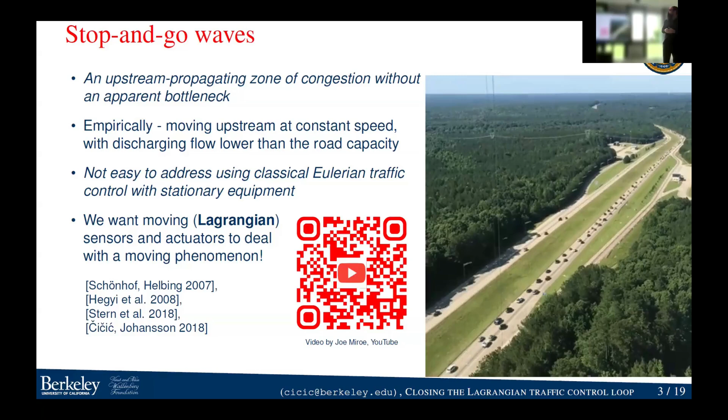So the overall structure of the talk you see here. In the first part, I will present the overall structure of the Lagrangian traffic control loop. I will very briefly go through all elements of it. And then I will talk about something a bit more recent and probably a bit closer to what you all are working on, trying to bring the whole traffic control story a bit closer to vehicles themselves, but more on that soon.

The overall Lagrangian traffic control loop looks something like this. So I will basically go through this whole loop, starting with the sensing, the actuation, the traffic model, the model learning, the traffic state reconstruction and prediction, and control law. So in the first part, I will be going through this control loop and explaining all parts, starting with the model.

Now, I do not believe you are very familiar with traffic modeling, am I right? Yes, somewhat, but yeah.

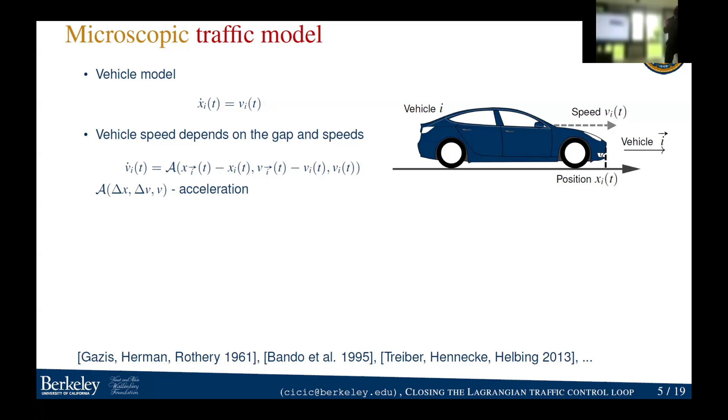Well, if you think about how to model traffic overall, if you're thinking about the individual vehicles, you really cannot go simpler than just looking at their longitudinal motion. You have their position, they evolve according to whatever their speed is, and then their acceleration will depend somehow on the gap between the vehicle itself and the vehicle downstream of it, and also the speeds and the differences in speed.

But we can go even further and say, well, if we're able to represent the traffic state in an aggregate manner by the traffic density, then the speed at a certain point where the vehicle is will just depend on the general traffic conditions around this vehicle. And that's how we end up with the simplest form of traffic flow model, which is the Lighthill-Whitham-Richards model. This model is just a simple conservation law that describes the evolution of traffic density, rho, and the traffic flow, Q, is directly defined as a function of the traffic density.

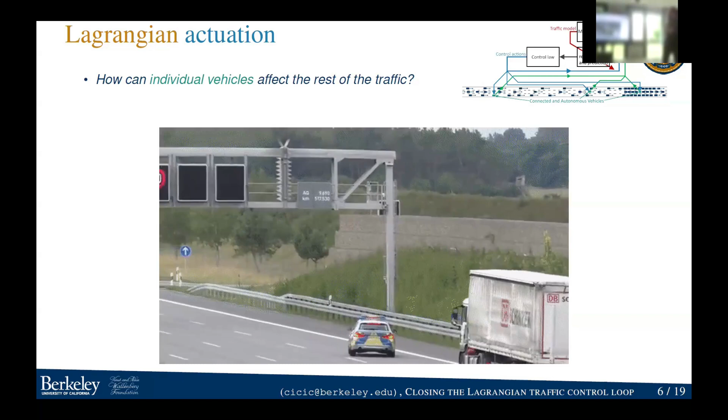And how can we control it? Well, how can we affect the traffic that consists of many vehicles by trying to control only a single vehicle? Is that realistic? Well, if you're a police car, it is very realistic. And what you see here is a police car performing what's called a traffic break. This maneuver is typically done for safety reasons, where there's some accident downstream, where the car would start meandering around the road and blocking the entire traffic flow. So that is a bit of an extreme case, but it shows that we can affect the traffic using a single vehicle.

Now, a bit more realistically, we really have two inputs, two ways to enter this system. So thinking of a single vehicle, we are definitely going to be able to issue some sort of a reference speed for it that it tries to follow, but it does not necessarily need to follow, because if we give it a very high speed, it might not be able to follow that speed due to traffic conditions. And this speed will basically determine its longitudinal motion.

And then apart from that, we might be able to set some target lanes for it. So tell it, go all the way to the right, or take the second lane from the right, or something like that. Now, the reason why this might be important is if you have a truck platoon, such as you see here, if you command one of these trucks to come to the next lane instead of following this lane, then all of a sudden you have a bit of a different picture.

So whereas in the beginning, the trucks were taking only one lane, now if these trucks are moving slowly, they will restrict the traffic flow quite a bit. You're blocking 2 out of 3 lanes, so that should affect the situation quite a bit. The way we can model that is by considering these trucks to be moving bottlenecks, which, if you've driven behind a truck, they definitely are, but here is how we do that mathematically.

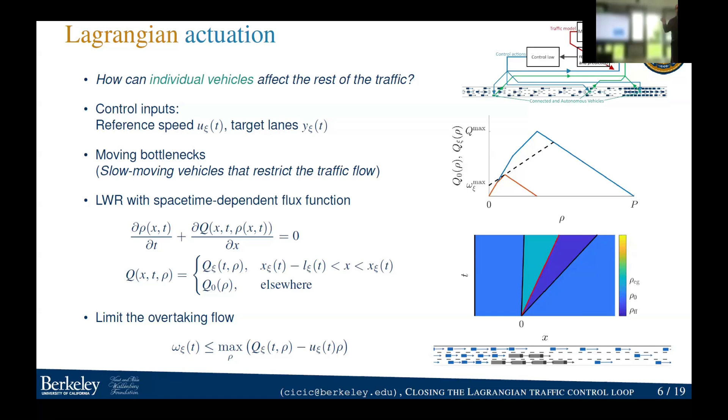Mathematically we can represent this by an LWR model, but now we have this flux function that is dependent on space-time. So essentially, where the road is open, we have one flux function, which is the big one, and then where we have our moving bottlenecks, we will have a different reduced flux function. That's one way to think. Essentially, we're restricting the overtaking flow. Now, that's basically the situation when it comes to the actuation. That's one way we can affect the traffic flow.

What about sensing? So next time you're in San Francisco, you can experience an autonomous vehicle. You can hail Waymo. And one thing that was really interesting for me was in Waymo, you have this screen that is showing you what the robotaxi is perceiving around it. The first time I was in Waymo, this was really interesting for me, because the vehicle, which has a LiDAR and many other sensors, has a pretty good picture of what's going on around it. So it knows where all of the other vehicles are, because otherwise it's not very safe.

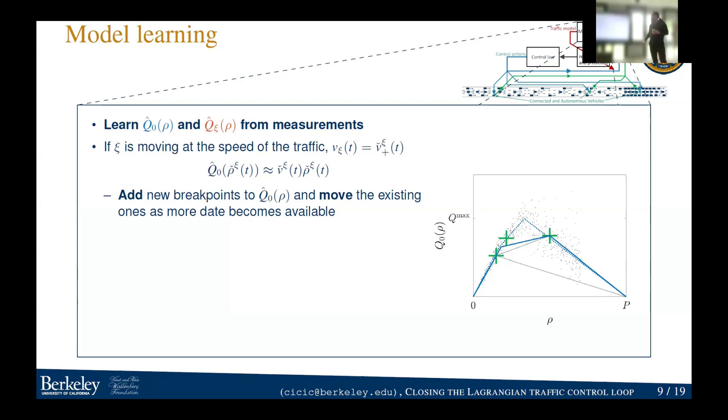As we gather more data, we should get a better picture of what this flux function should look like. After some time, this is what we get. Now, for the effect of the moving bottleneck, the situation is more complicated because we cannot directly measure the traffic state on this flux function. Instead, we can rely on the fact that the downstream and upstream traffic conditions should follow the form I talked about before.

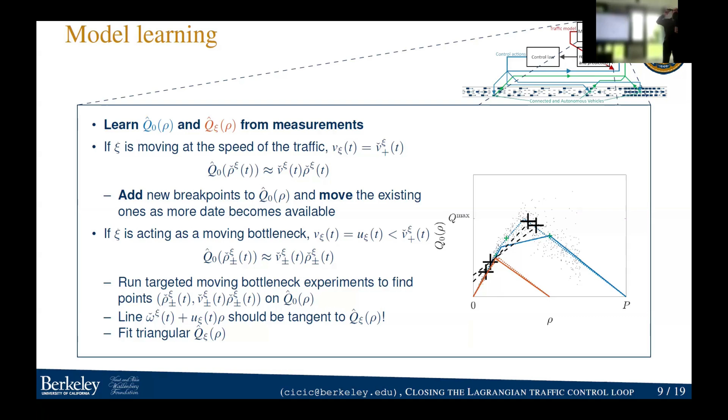Essentially, the line connecting the downstream and upstream traffic conditions should be a tangent to the moving bottleneck flux function, and its slope should equal the speed of the moving bottleneck. So by collecting more and more data, we are able to fit a moving bottleneck flux function that best describes this data.

Once we have the model, once we have a reconstructed traffic state, we can actually start implementing some traffic control. And in particular here, what we're trying to do is dissipate a stop and go wave. So first, what are the controlled inputs? Well, like I said, the speed of a moving bottleneck will be one control input.

And then based on how we arrange multiple vehicles, let's say we have a platoon of vehicles and we can command them to take one lane or to take two lanes. So based on how we arrange them, we might be able to essentially control how much overtaking traffic flow they might admit. And that is the story about blocking one lane or blocking two lanes or similar things like that. So based on their formation, the limitations on the overtaking flow might be another control input that we might be able to use.

So overall, if we want to minimize the traffic total time spent, which is a general metric for how good the traffic is flowing, we just want to maximize early outflow. So we want to push as many vehicles out of the system as possible, as early as possible. Now, if there is a stop and go wave, then this stop and go wave will be acting as essentially a limit to how much throughput the road can take.

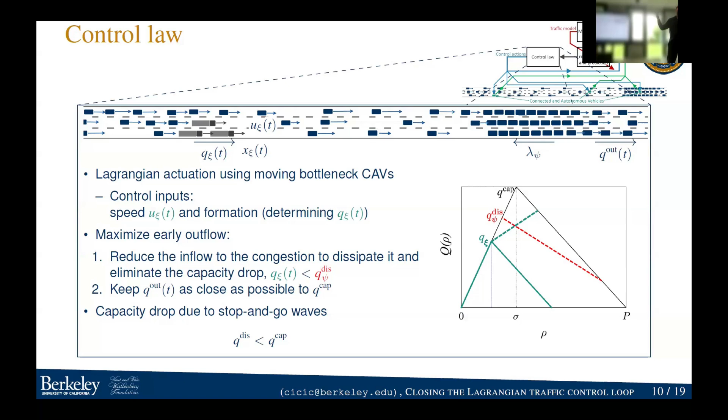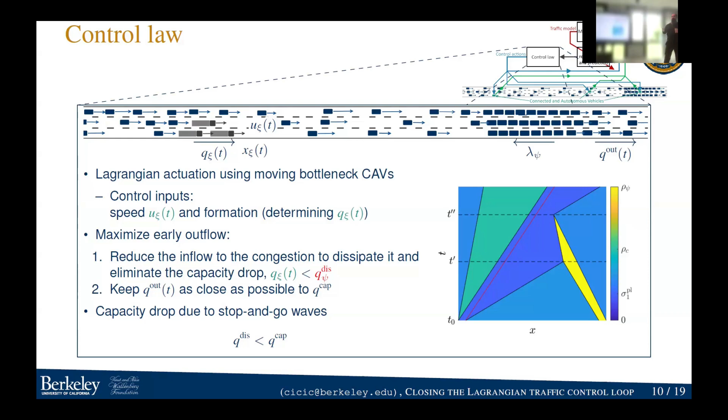Now, if you have a single vehicle on a two-lane road, well, in order to dissipate a stop and go wave, we need to be able to restrict the inflow to a level that is lower than its outflow. So if you have a two-lane road and you're controlling a single vehicle, it might not be that hard to do, actually, because you're blocking half the flow. However, if you have a multiple lane road and you're only controlling a single vehicle, then you might have a bit of a problem achieving this, because the outflow from the stop and go wave is reduced, but it's not that reduced.

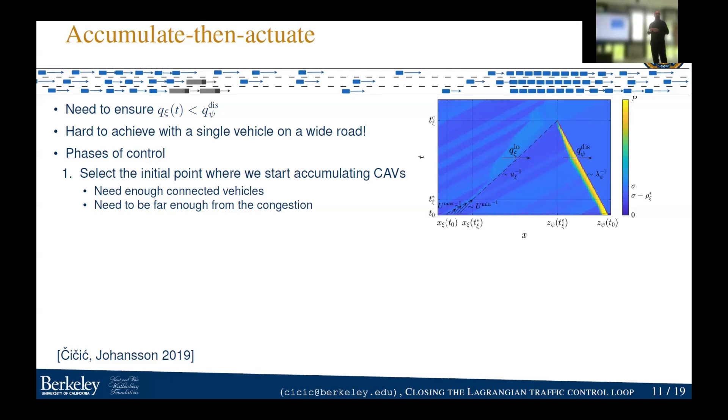So instead of immediately controlling vehicles as moving bottlenecks, we might need an extra step. First, we can try to accumulate enough vehicles so that we can create a unit that is driving together. And by doing that, we will now be able to block multiple lanes, or in this case, 2 lanes out of 3. And if you're able to block multiple lanes, then you're likely to be able to restrict the inflow to the stop and go wave to a lower level than its outflow.

So essentially, first we select where we collect the vehicles, then the vehicles that are downstream slow down, the vehicles that are upstream speed up. Once we have enough vehicles, then we start acting as a moving bottleneck and dissipating the stop and go wave. And the nice thing here is that if we have a lower penetration rate of the vehicles, it would just take more time to collect enough vehicles in order to implement this traffic control. But we will still be able to do the traffic control, it'll just take a bit more time.

So that basically wraps up this full Lagrangian traffic control loop. So to recapitulate a bit, we use the vehicles as Lagrangian sensors to sense the traffic conditions. Based on the measurement, we learn the traffic model. By combining this learned traffic model and the measurements, we are able to reconstruct the broader traffic state.

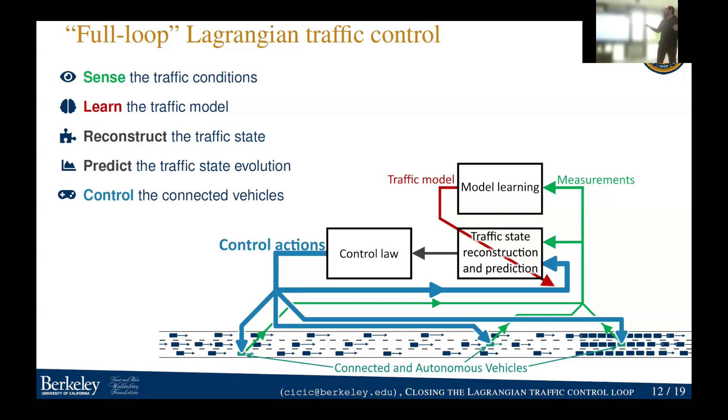And then also applying the model, we predict the evolution of the traffic state based on the control action that we take. And ultimately, we're able to dissipate congestion on the road. So as an example, I give here a scenario where we have stop and go waves randomly arriving from the downstream end of some road, and they're being dissipated by multiple connected autonomous vehicles acting as moving bottlenecks. Well, the exact details are not that important.

Now, if we have full information about what's going on the road, we can start strategically slowing these vehicles down, having them act as moving bottlenecks, and then basically ensuring that these stop and go waves are dissipated sooner. So instead of having them go on in time, these stop and go waves will be dissipated.

Now, even if we do not have the full information about the traffic state nor the traffic model, then applying the model learning that I talked about in the traffic state reconstruction, we're still able to do a similar job. Of course, because we have less information, the control performance is not as good, but we're still able to dissipate the stop and go waves and control the traffic.

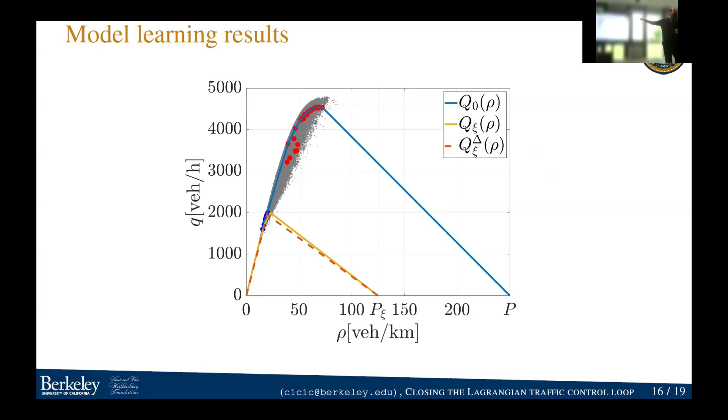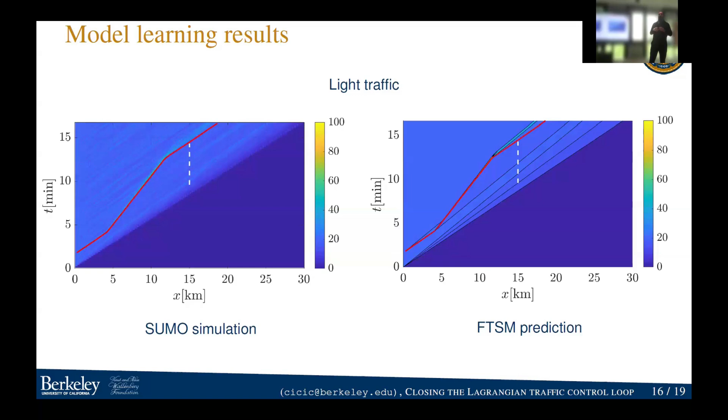The same thing happens when the traffic is lighter. With the previous level of traffic, we correctly predicted that there will be some congestion building up at the moving bottleneck. In case of lighter traffic, there's much less congestion, and we correctly predict that as well. So that's all great, but there are three big problems, three major issues with this work.

First one is the traffic simulation should be more realistic. In particular, here we used SUMO as the microscopic traffic simulator, and while the car following model was pretty good, we used the intelligent driver model, we had instant lane changing. So basically, vehicles were teleporting to the next lane. Is that a problem? Maybe, maybe not. It's not a very realistic situation at any rate.

The second one is, what we assumed is that if a vehicle is close to our Lagrangian agent, so our ego vehicle in essence, which in this case was the actuator vehicle acting as a moving bottleneck, like 100 meters away from it, that we just know its trajectory. And that might not be a very realistic assumption to make.

The third problem is we don't really know if this would really work with a human driver. In this case, all of the vehicles were being just simulated. So whatever the microscopic model was saying would happen, that's basically what we assumed would happen.

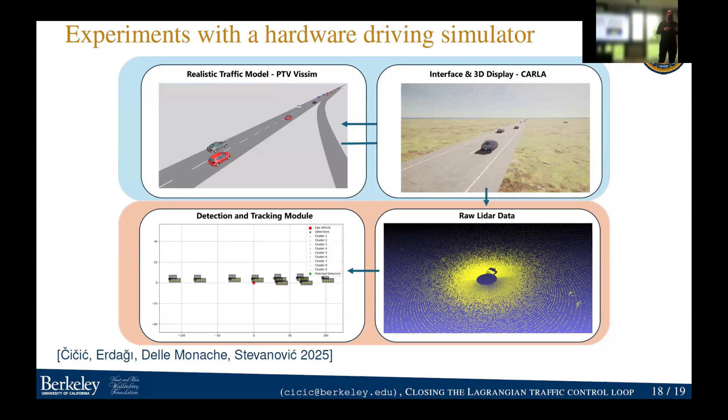Furthermore, we had the hardware driving platform where we had my co-author, Gökçe, drive one of these two vehicles. So we wanted to essentially replicate the experiment that I was talking about. We want to have one vehicle that is acting as an actuator vehicle, and this vehicle was simulated. Like I said, we wanted to see how a human driver will react to this kind of a moving bottleneck traffic control maneuver.

So we had the second vehicle, which was human driven. And what this vehicle was doing is basically just traveling with the flow of the rest of the traffic, entering the congestion caused by this moving bottleneck and just traversing it and continuing on. So essentially just a human driver participating in the traffic on equal footing. So these two vehicles had the simulated LiDARs mounted on them, and then all of the other vehicles were purely simulated and were there to just act as the background traffic.

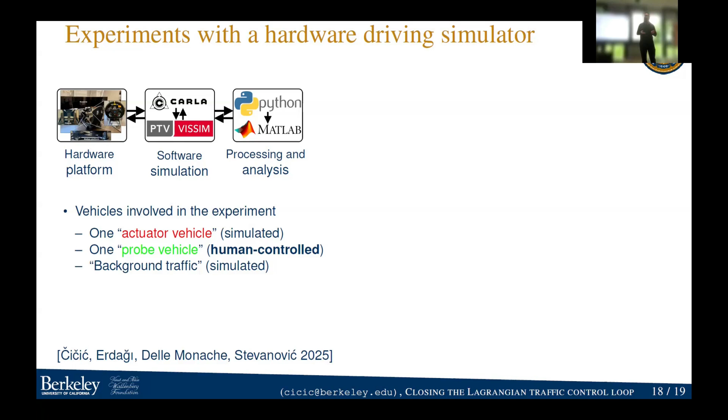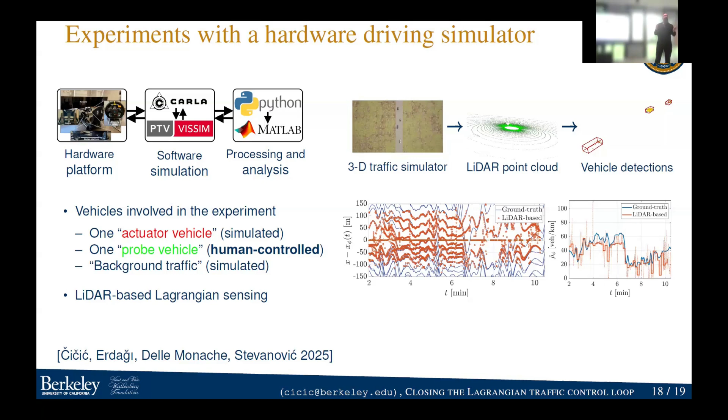So using this pipeline that I described, we were able for both of these vehicles to essentially get the local trajectories of the surrounding vehicles. Based on that, we were able to estimate the traffic conditions, so the traffic density and the average traffic speed. We put this information into the whole machinery that I was talking about before, learned the traffic model, and then finally reconstructed the overall traffic state.

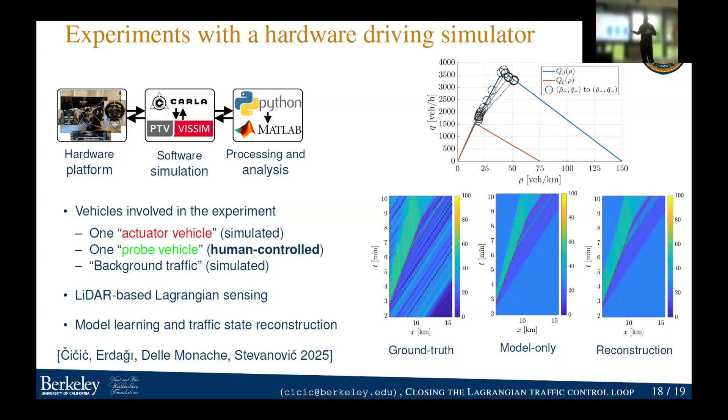So on the very left, you see the ground truth using kernel density estimation to get traffic density from raw vehicle trajectories. Now, even using only the model, which is equivalent to what we had for the previous case, we are able to represent the evolution of the traffic relatively well. But then if we add the Lagrangian sensed information from these two vehicles, the reconstruction becomes even better. So basically, we are able to more or less predict the ground truth evolution of the overall traffic conditions.

So that brings me to the end of this talk. The question that we wanted to answer is how can we reduce traffic congestion using only a small portion of connected vehicles, whose sensing data we can access to some degree, and whose actions we can control, again, to some degree.

What I think is interesting is that the road traffic system is one of the largest systems globally, and there is very, very little feedback control that is interacting with it. The power system is probably larger, but there is actual control happening there. Well, here I'm talking about highways. In urban traffic, there are some controls. I do think that connected vehicles bring an enormous untapped potential, both by using them in the ways that I described and many other ways. So I think we should be thinking about how best we can utilize them.

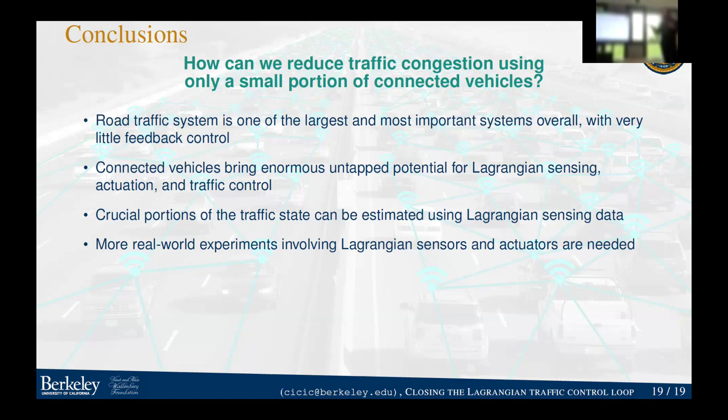I mean, using the data of a lot of vehicles, well, if you have Waymos running around, they probably have a lot of data of the traffic around them. So if we had access to this data, we could probably do quite a bit. But also, of course, in order to make sure that this actually works, we definitely need to perform more realistic experiments, hopefully on public roads. So with that, I'd like to thank you for your attention and take any questions you might have.